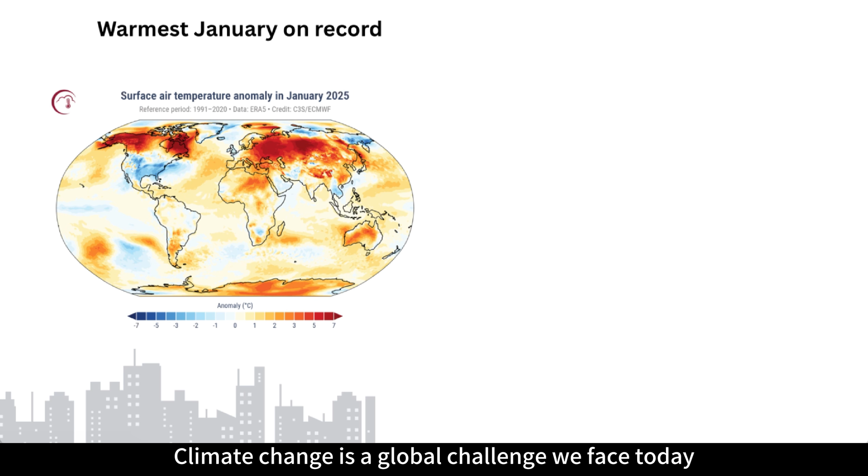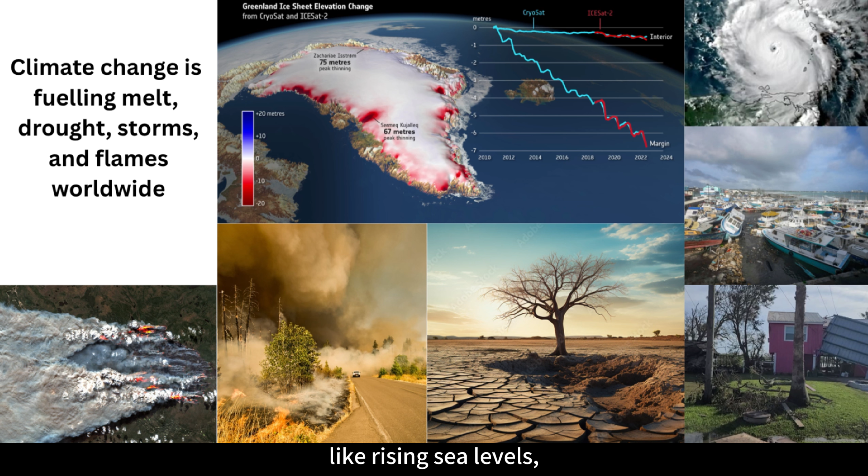Climate change is a global challenge we face today. One of the primary drivers comes from energy use. If we don't take action, we could face serious consequences like rising sea levels, droughts, and health issues.

China is the world's largest energy consumer and carbon emitter. Among all sectors, buildings account for nearly one-third of total energy use, and public buildings like hospitals, offices, and schools play an important role in that.

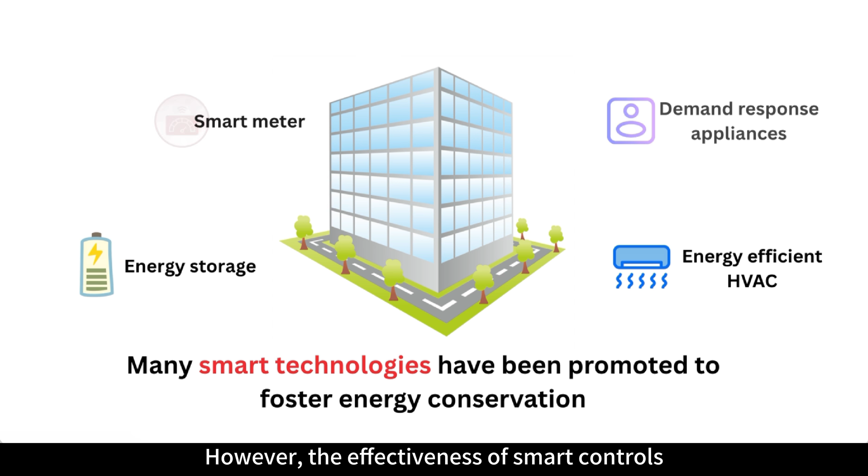To promote energy conservation, many smart technologies have been introduced. However, the effectiveness of smart controls can be undermined by insufficient user compliance. For example, in the setting of air conditioner operation.

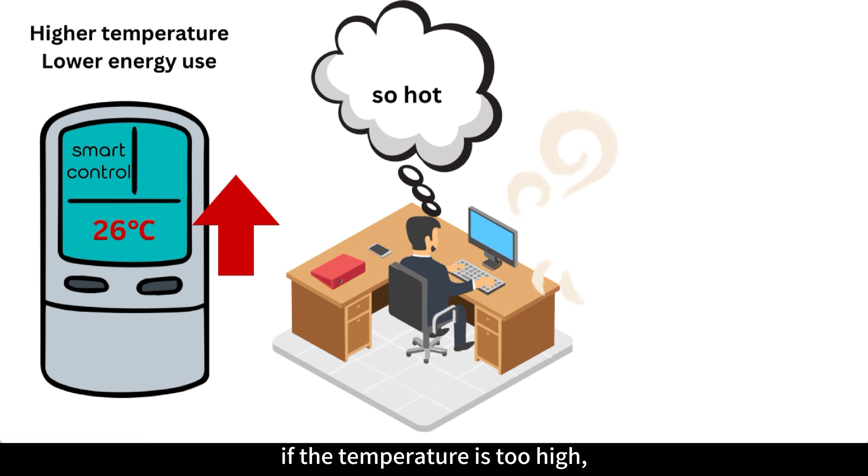In summer, smart controls tend to set higher AC temperature to reduce energy use. However, this can make people uncomfortable if the temperature is too high, leading users to lower the temperature.

Similar conflicts between sustainability goals and user preferences could also arise in other energy use scenarios. For instance, a driver's personal habit may not be environmentally friendly.

So here's the key question we want to answer: how can we reduce energy use through smart controls while still ensuring that users are comfortable and willing to cooperate? We look into different smart control strategies and assess their impacts on energy savings and user compliance.

Last summer, we carried out a randomized control trial in Hubei province, China. The experiment involved 20 public buildings.

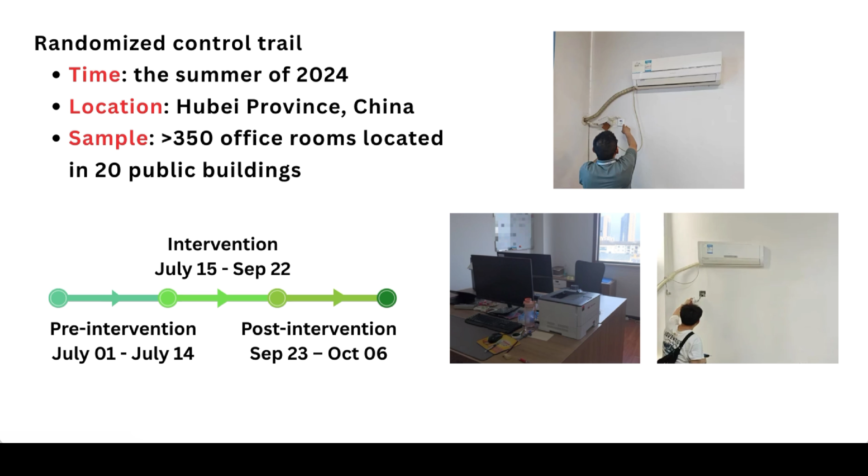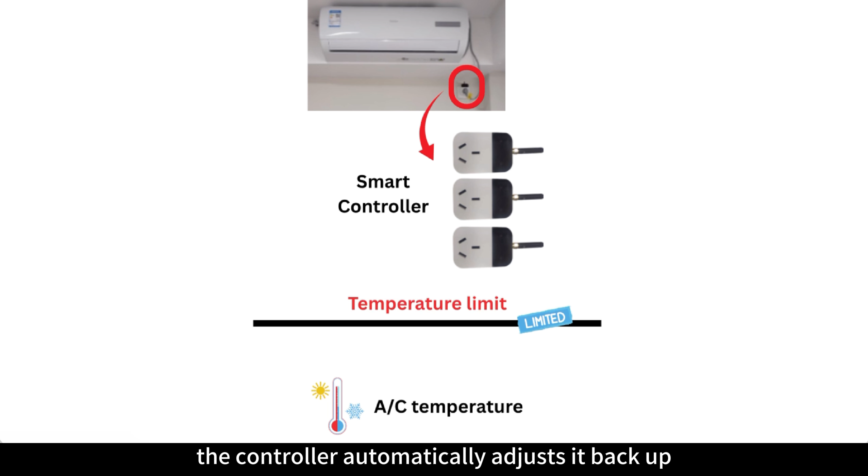The idea behind smart control is that the controller checks the AC temperature at regular intervals. If it drops below a preset limit, the controller automatically adjusts it back up. Importantly, users can still use the remote at any time to override.

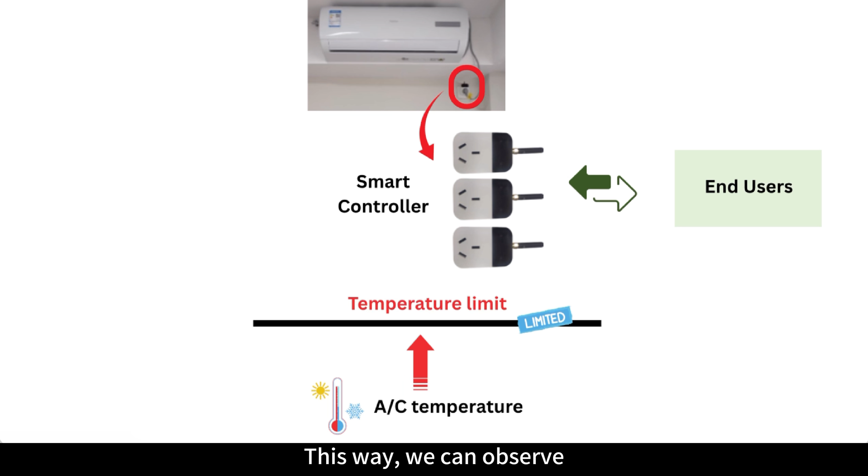This way, we can observe their behavior while minimizing their resistance, and data are sent to a centralized platform where control strategies are transmitted.

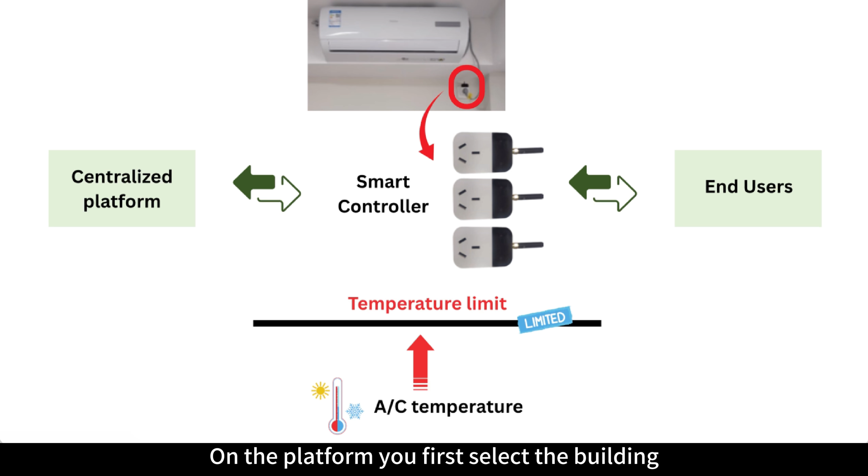On the platform, you first select the building, then choose the room. On the next page, you enter the temperature limit and how often the system should check.

We designed 5 control strategies. The first 3 groups, from low to high, had different temperature limits. Naturally, we expect that higher temperature limits will lead to more energy savings.

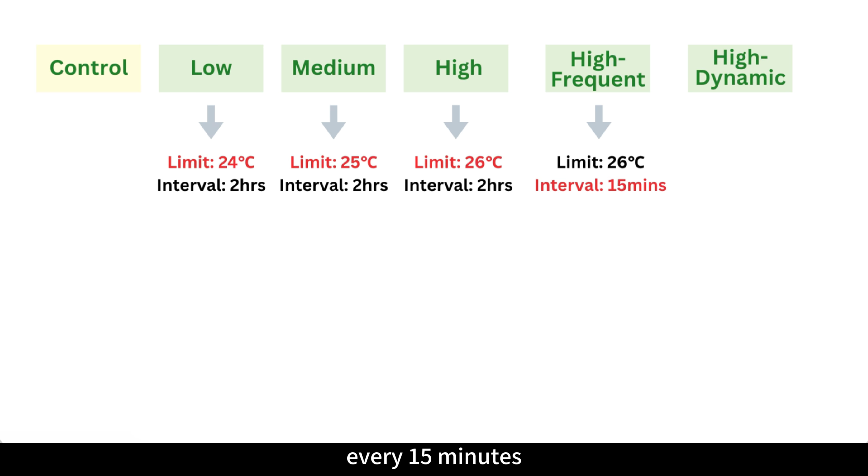Next, the high-frequent group has more frequent adjustments, every 15 minutes. Finally, we test a dynamic strategy where the temperature limits will be adjusted for selected samples based on users' past behavior.

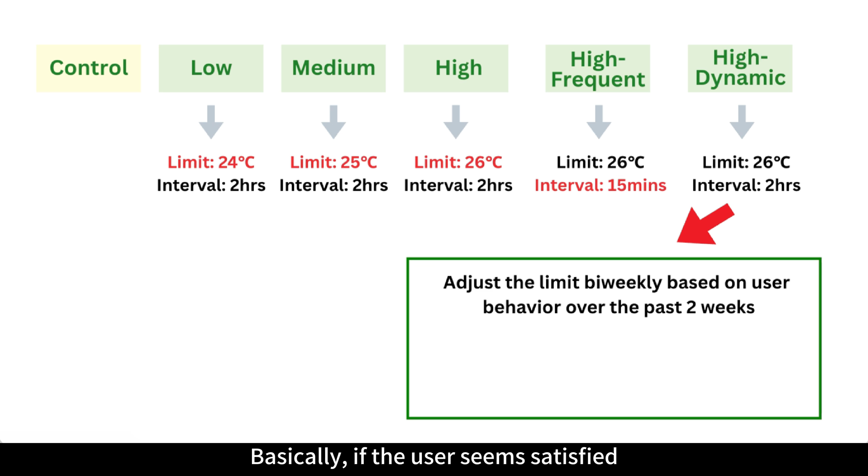Basically, if the user seems satisfied, the limit will be increased by 1 Celsius degree. If the user seems dissatisfied, the limit will be decreased by 1 Celsius degree. Otherwise, it remains the same.

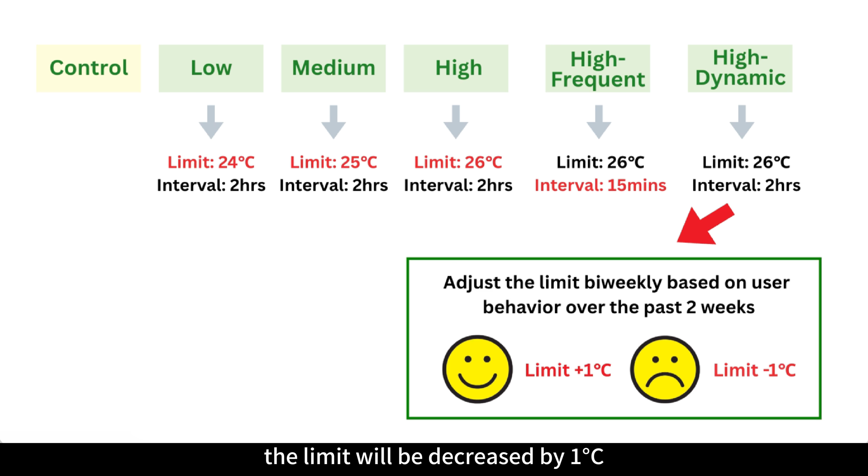We use difference in differences to estimate the effects.

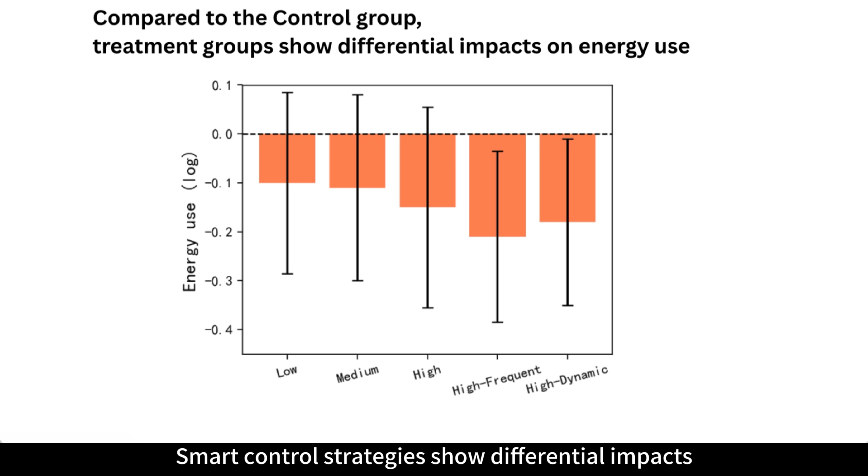Smart control strategies show differential impacts on energy use. However, statistically significant energy savings, nearly 20%, were only observed in the last 2 groups.

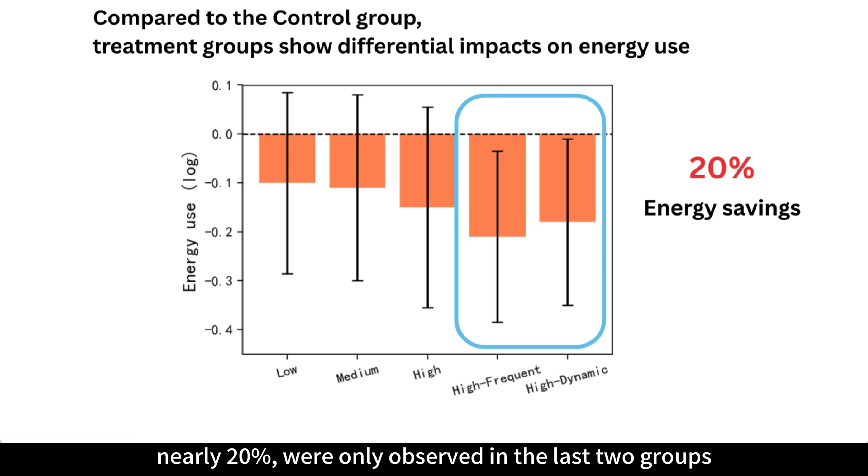This implies that simply increasing the temperature limit isn't enough. More frequent or dynamic strategies can better unlock the full potential of smart controls.

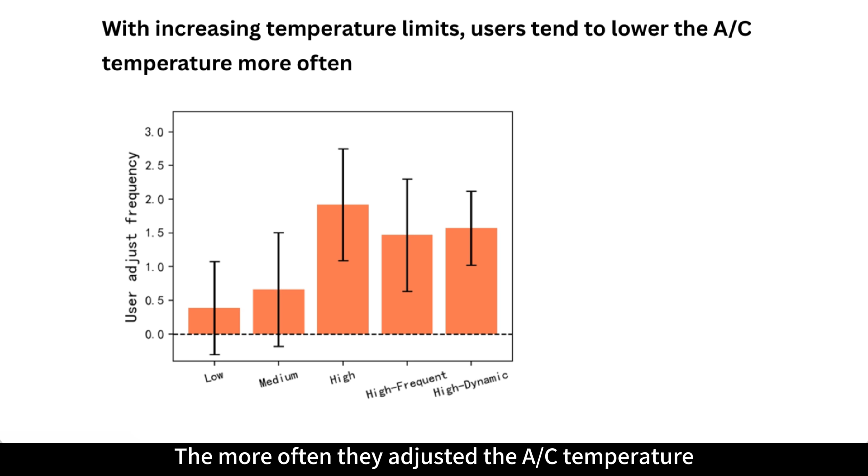We also look at user behavior. The more often they adjusted the AC temperature, the lower their compliance.

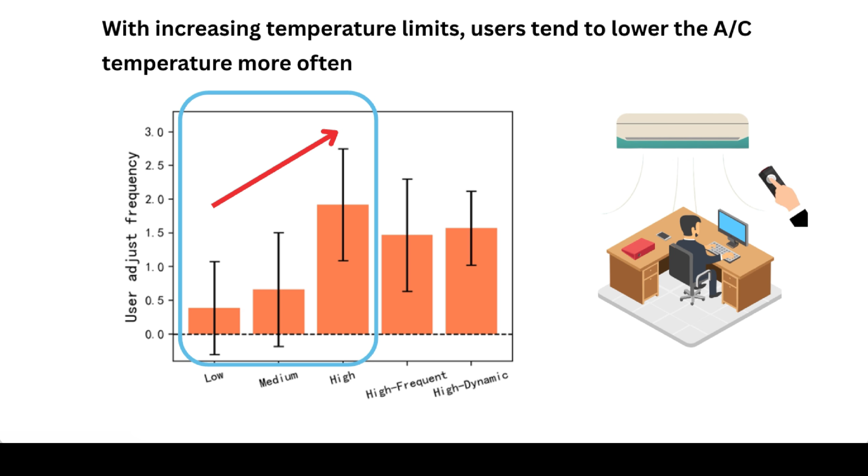We find that as temperature limits increase, users are more likely to make adjustments. But under frequent and dynamic strategies, users actually did not resist more, which is encouraging to us.

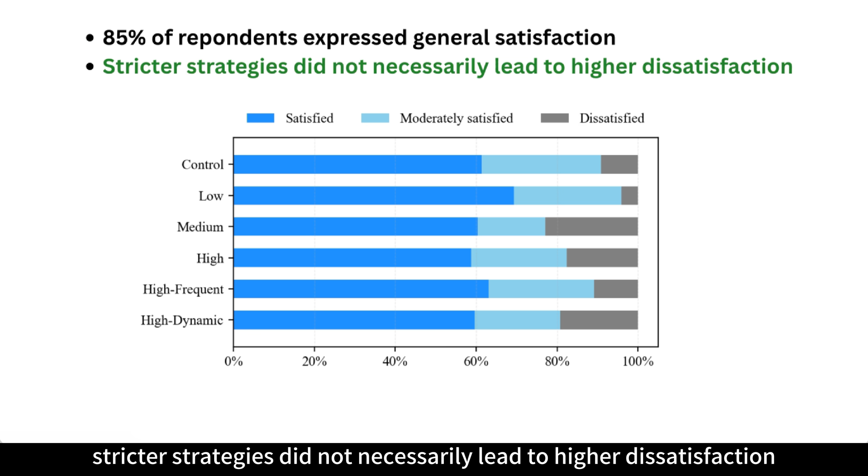While you may wonder, did users feel comfortable or not? Our feedback survey shows that stricter strategies did not necessarily lead to higher dissatisfaction.

To sum up, we provide empirical evidence for smart control as an effective energy-saving approach.

We emphasize the importance of user compliance in green technology applications and offer practical solutions to resolve the tension between sustainability goals and user-centered considerations.